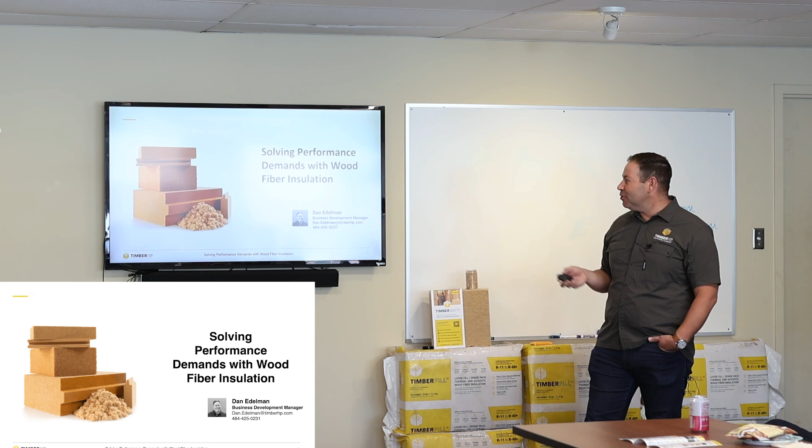Thanks, Darren. And so, yeah, I'm going to go ahead and get started. So I'm going to be going over solving performance demands with wood fiber insulation. So TimberHP, that's the company that I'm with. We basically changed the name from GoLab to TimberHP, mostly because obviously we're a timber-based product or bio-based product. And the HP stands for high performance, healthy planet, and healthy people.

So those are kind of the three pillars that we really strive upon, really trying to get our product into the market to, at the end of the day, sequester carbon, but also make sure that the products are very healthy for the installers that are using it and the occupants of the homes. So this is just a quick, brief video on kind of our mission story of why we're doing what we're doing.

You know, our family's always been in the sawmill business. We love the way of life, and it's hard work, but there's nothing wrong with hard work. If you lived on an island, probably you'd be in fishing, or if you lived in the desert, you'd be doing something with sand. But we live in a sea of trees, and it's only natural that we make a living from the woods and off the land. We make square boards, rectangular boards, out of round logs, so we make a lot of chips. And those all go to the paper companies.

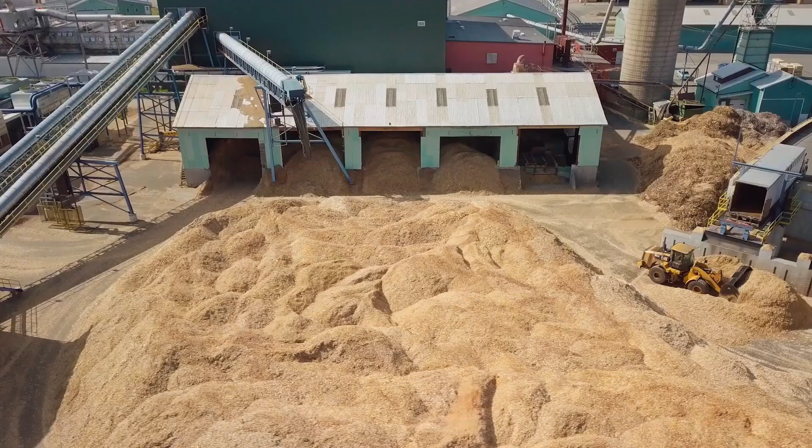The paper industry has been suffering. When we lose those paper companies, we lose the market for those chips. And that means that the whole wood industry in Maine is suffering because we need markets for a low-grade wood. Buildings account for about 40% of the total carbon emissions globally. Buildings have to save energy to address climate change.

You know, one of the advantages of having a design build company and not just being an architect is that you get feedback every day about the buildings you're building, the materials you're using, and how it's going. It really depends on the insulation product you use as to how effective you're going to be in actually saving carbon. We've always had complaints about insulation. It's itchy, it's scratchy. We make all these microplastic beads when we cut it. They have kind of scratchy respiratory issues after using it. They're using full respirators and Tyvek suits in many cases to install it. We knew there was a problem.

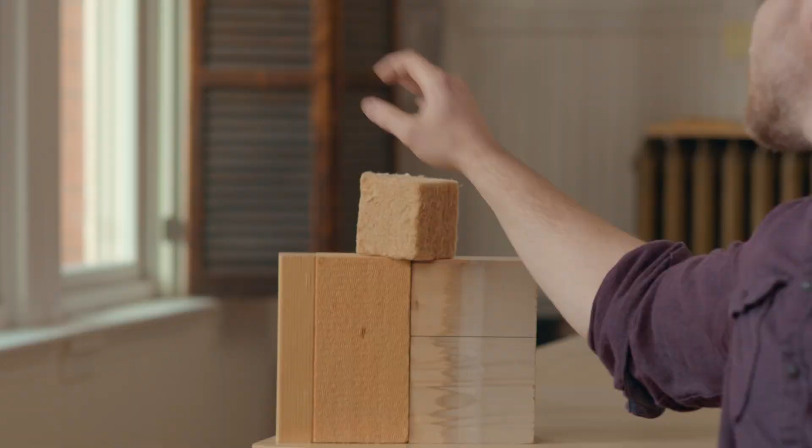It takes about 8 years of energy savings, carbon savings in emissions to pay for the carbon debt of the original insulation you installed when you're using conventional insulation. Quite frankly, we don't have 8 years to wait. You just pick it up, you know what it is. You know that it's wood fiber. I wanted to know more about the product and how it performed, and Matt said, best in class acoustics, best in class vapor permeability.

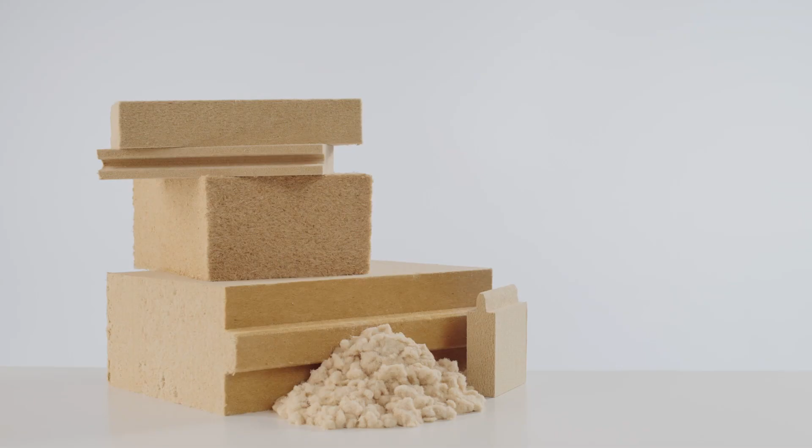So we knew about wood fiber insulation from Europe. We're talking about a material that's natural, it's 95% wood. There's no added toxins. And I said, when are we going to use it? And he said, never, because it's not manufactured here and shipping it is not a business model that works. And I just couldn't really accept that. I couldn't understand why this product was not manufactured in North America, where we have better wood resources than they do in Europe, and we have a building style that fits this type of insulation better than what they have there.

I lived in Maine all my life, and you drive around Maine, any town you go through almost, there's some buildings sitting there that something used to be there. Most people don't realize what a tremendous economic engine a paper mill is. They employ hundreds of people.

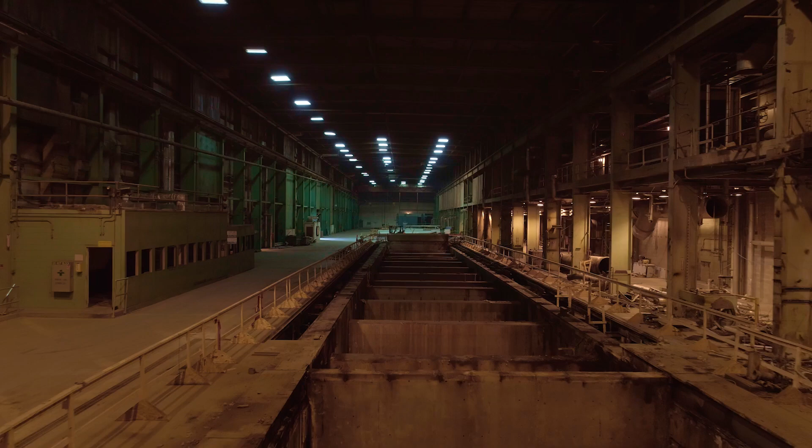The people who worked at the UPM paper plant for so many years, their intellect, their capability, their passion for forest products for the community, losing that out of your community, a small community, is absolutely devastating.

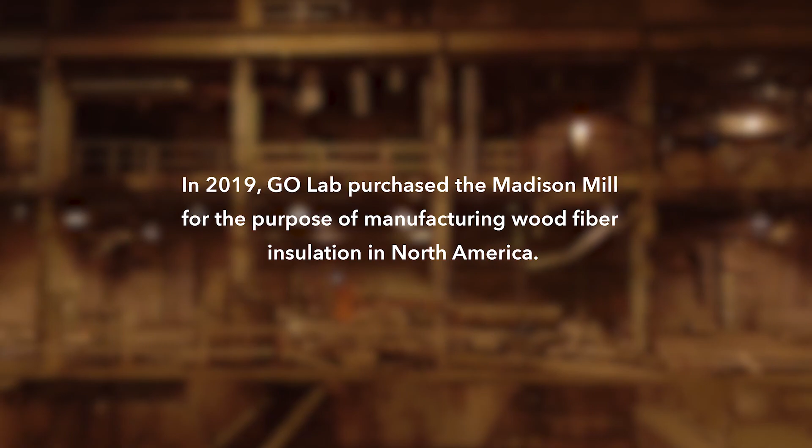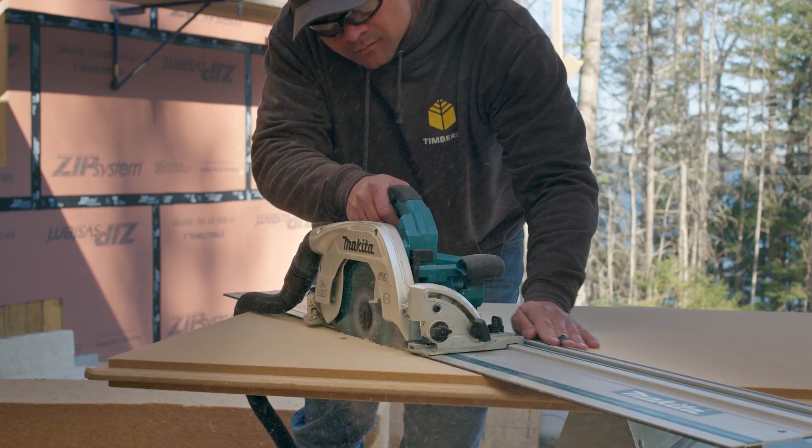When we're up at full production, we're employing more than 100 people in that community. Well, those are 100 good-paying jobs in a community that is a couple thousand people. That has a multiplier effect that is massive for the overall community, and it really is the identity of a lot of these communities in Maine.

We need working forests in order to grow the forest, in order to keep them viable. When it comes to Madison, it's right in the heart of the wood basket for Maine. We have a huge market in the Northeast for insulation. It's the biggest insulation market in the entire United States. We have a lot of existing housing that needs to be upgraded.

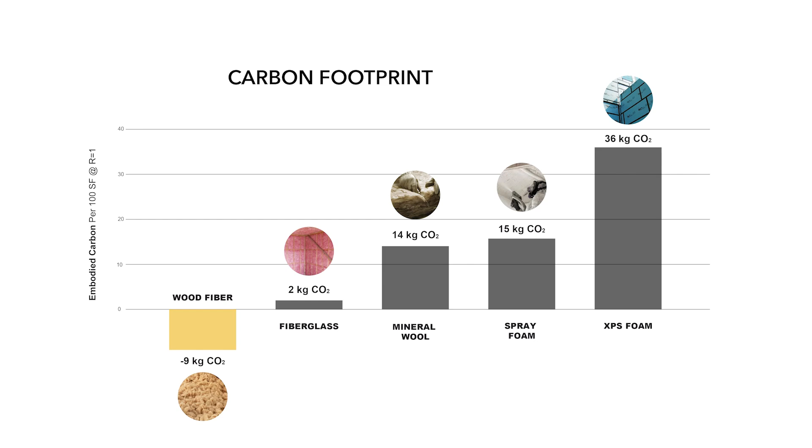The key to addressing the climate crisis with buildings is to not only save energy in the future, but also do it with insulation products that come to the job site with a negative carbon footprint or that are carbon storing. And wood fiber insulation is the only scalable option that can do that. You know, it's easy to handle, it's very familiar, it's not scratchy. They can cut it easily. The byproduct of the cutting is sawdust.

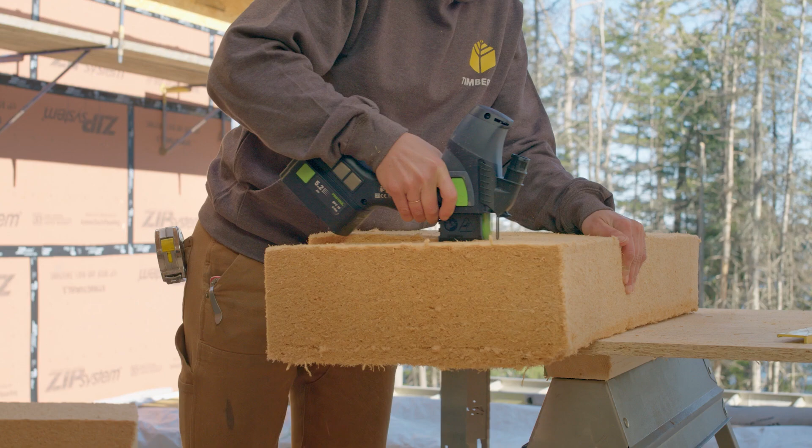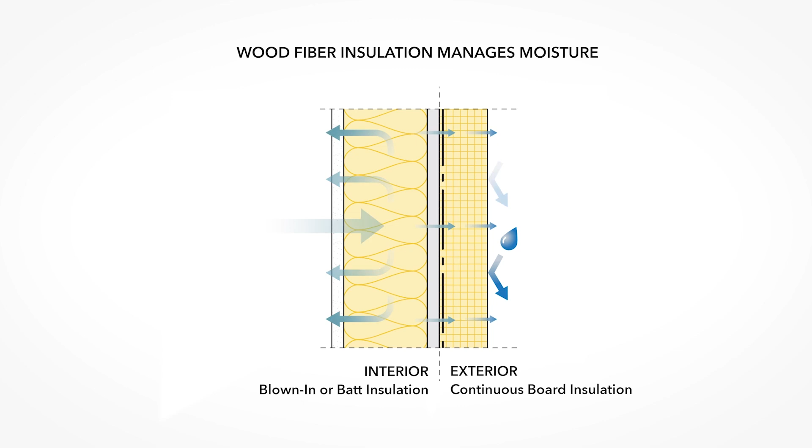With wood fiber, you never have that impermeable layer, and like Gore-Tex, it allows that moisture to move through the assembly, not causing any mildew or rot in that wall assembly. And so the game-changing aspect of wood fiber insulation is that not only does it have the favorable building performance attributes, but it's also cost competitive. And that's really key to the success of any insulation, is that it has to be cost competitive with the alternates in the market, but also bring the building science performances that we need.

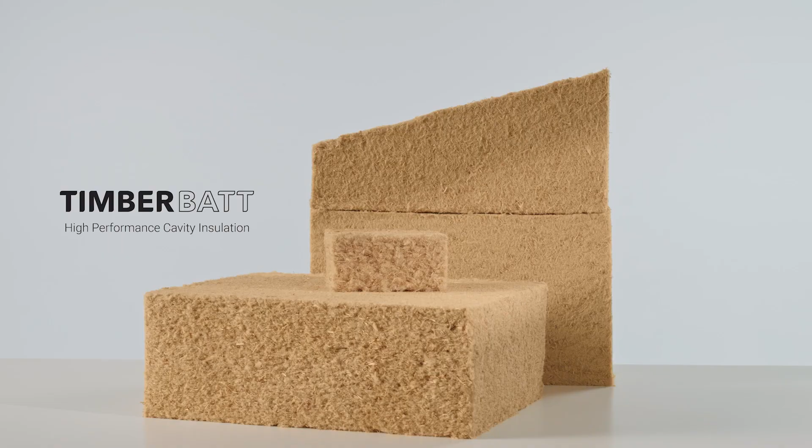It is a dynamic industry, and we have to keep changing to keep up with the times. Every time you add a little more value, you leave some of the competition behind. Well, I see the same thing with GoLab. They're going to make at least 3 different products there. You know, that's adding value.

Wherever there's timber, there's sawmills. Wherever there's sawmills, there are residuals that they need to get rid of. And everybody I know that burns their chips would rather sell their chips to somebody like a GoLab or a paper company. Once the reputation gets out there and what a great product this is, and people learn how to use it, I think it will go all over the country.

So one of the really cool things is we were doing the same training up in upstate New York. Sorry, it gets a little loud.

We were doing a training up in upstate New York, and the lumberyard that we were at actually said that they buy their lumber from Robbins Lumber, and now they're also buying the insulation, so they're literally using almost the entire tree. The only part of the tree that's not used is the bark in our current facility.

So this is our current facility. We're sitting on the Kennebec River, so it's absolutely beautiful. If anybody ever wants to go to Maine, we do have factory tours as well. It's quite an experience when you're there. It's in literally the wood basket of Maine. When I go, it's very humbling for myself going in there with this logo, and actually going into the town, and the town is extremely welcoming of us, which is a big part too.

You can see these 2 little, they're actually like a Dyson vacuum cleaner, and it'll go through the process, but that's like a drying chamber. We do use hydroelectricity. So 99% of the factory is actually run on hydroelectric power. So that's another part. Currently, for our EPDs, we need 1 year of production time to get a good sense of what those are.

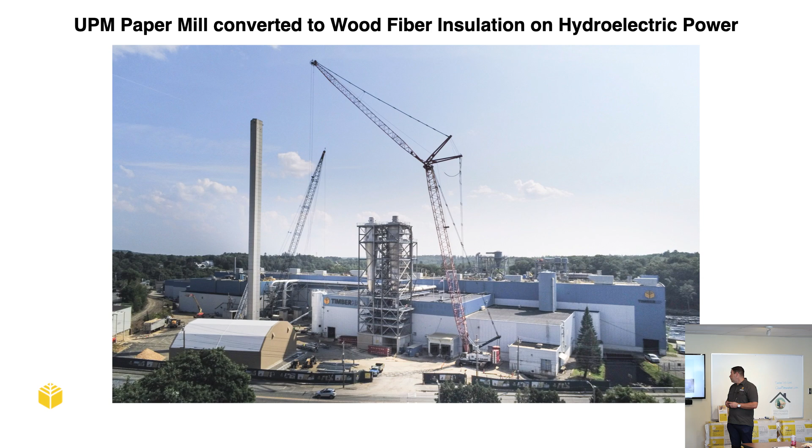So for that piece of equipment, we brought the equipment over from Germany, and we're getting some assistance on rebuilding that machine right now. It's all built, and we're just missing one part that was left in Germany, so we have to ship that over now. It was basically like Barnwood Builders, if anybody's familiar with that show, how we numbered and labeled every single joint and intersection, then shipped it over. The machine actually cost us about $2 million to buy and $4 million to ship. So just like a lot of these insulation products, sometimes the shipping gets a little expensive.

And all the best stuff comes from Germany, though, right? Yeah, exactly. German engineering.

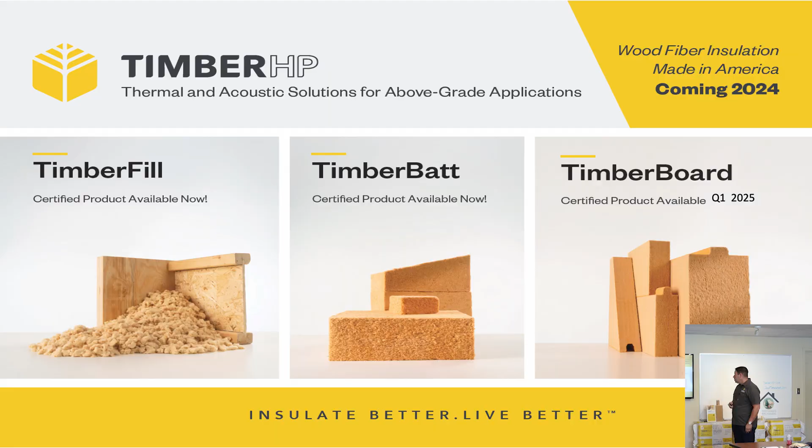But the batt line is a very nice run. The other thing I'll say when it comes to product sourcing, we have 3 separate product lines. That's something very new to me, coming from a mineral background. We actually have a line just for timber fill, a line just for TimberBatt, and a line just for timberboard, and we could run all 3 lines at once. So our production capacity is actually much higher than even a mineral facility.

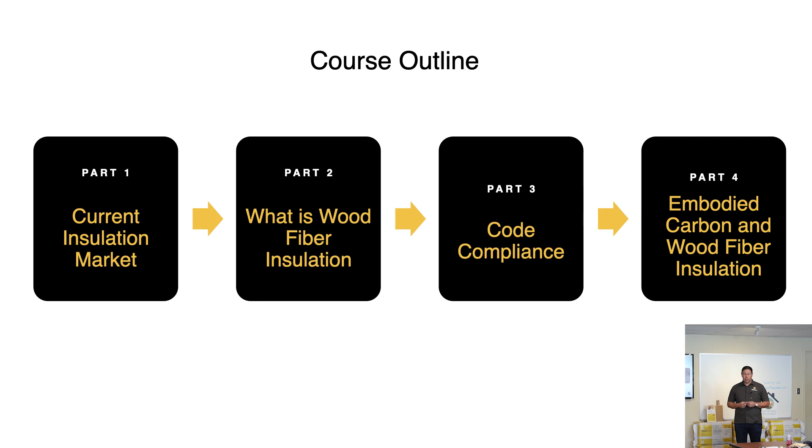And basically, I always like versus this one, I like this one. The course outline: we're going to be talking about the current insulation market as a whole, what is wood fiber insulation, we're going to talk some code compliance, some codes and standards, and then we're going to go through some real world things on embodied carbon and wood fiber insulation.

So the current insulation market - this is actually a cool project up at the College of the Atlantic up in Maine. It was European board, obviously, but also used our timber fill product in that.

So in the U.S., it's a $100 billion insulation market right now, so it's a massive market. Fiberglass holds most of that - it's 56% of the market is just fiberglass. Foams and plastics are about 35%. Mineral wool is 4.7%, and then all the others.

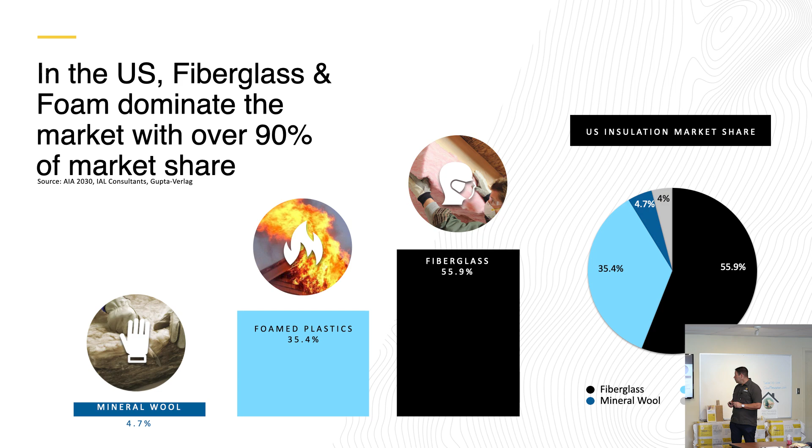So we're still new to the North American market. If anybody has checked the news or got our newsletter, yesterday we announced that we do have a strategic partnership with Saint-Gobain, which is the same company as CertainTeed - so the global leader and the biggest company in the building material world. They're going to help us with our codes and standards, getting more UL listings, more ASTM standard testing, a lot of just help with that. And they're also going to be distributing in the Canadian market as well. So that was some big news.

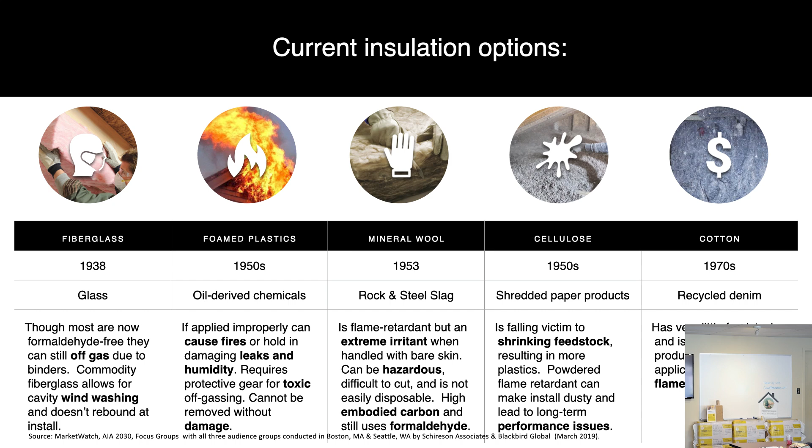So a little on current insulation options that we have. Fiberglass developed back in the 1930s. There's actually some fun stories when people first started insulating homes in general. Painters wouldn't actually paint the houses because of something called vapor drive, and it would pop the paint off the exterior of the house. So we'll get into a little bit more of that, also with vapor control and different climates and all that. Obviously, this is a cold climate.

So basically, there's increasing building codes as well, and that's one of the biggest challenges right now with the current insulation market and why we're seeing so many shortages, because now code is actually driving it up. Even though there's basically the same amount of buildings getting produced year over year, when the insulation packages are elevated, especially with continuous insulation, that's going to put a bigger demand of insulation products out there. Now, if we're not thinking about sustainability when we're looking at these insulation products, it could take a very long time to make sure that we're still carbon neutral right out of the gate with those insulation products.

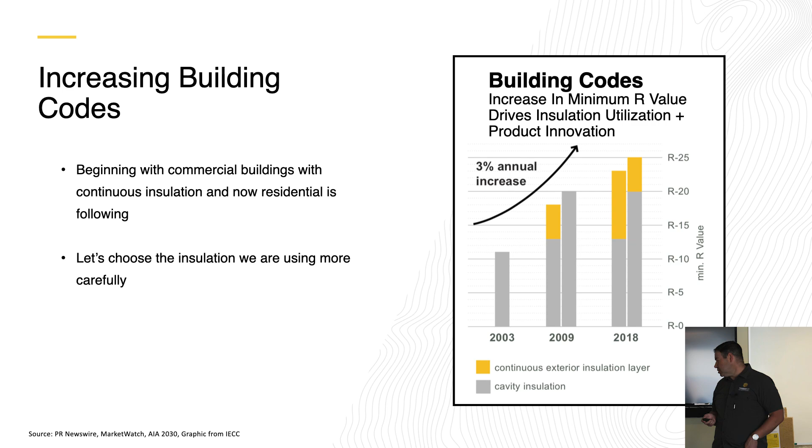And then, there really hasn't been any new updates in insulation products out there. And when you start looking at some of the practices that we're currently doing, if you need a hazmat suit to install a product, maybe it's not the right product. I understand there's a lot of positivity with air sealing and other things like closed cell spray foam. But there are other options out there to build differently, and one thing I talk about a lot is vapor open airtight, allowing houses to still dry out properly without trapping moisture.

Up here, I remember vacationing. I grew up in Michigan, and I remember vacationing in Minnesota, upstate, Upper Peninsula, Michigan.

In the summer months, nobody had air conditioning. Now everybody has an air conditioner, so that's something else that's changing. I know this year in Minnesota, we changed some climate zones. Some climate zone 7 counties are now climate zone 6, which is just showing that it's getting warmer.

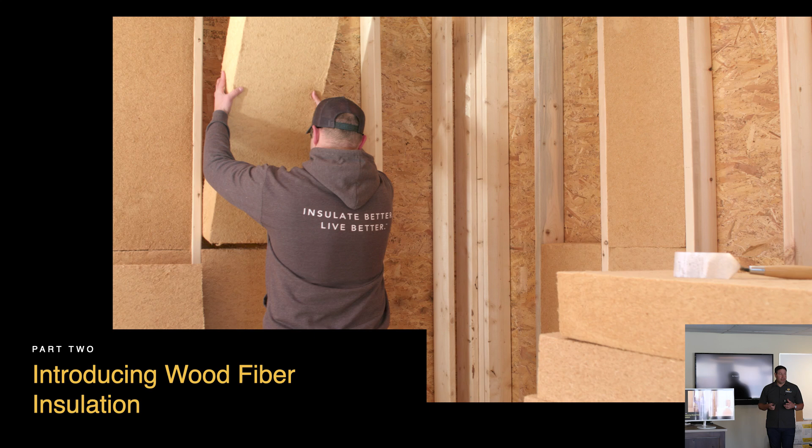Having no vapor barriers in a system is actually very beneficial for the drying potential and durability of that wall assembly. Then introducing wood fiber, you could see night and day difference. It was a cold day, which is why Scott Dion is wearing a sweatshirt, but you could see no gloves. It's not an itchy product, it's not an irritating product. It's just simply wood fiber.

When we look at the current European market, it's a $1 billion industry over there, and they're building most of their homes that way. 25% are wood frame, and the rest are actually all CMU, concrete masonry units, so a lot of concrete over there. It's also a price premium, similar to this market, just from shipping it.

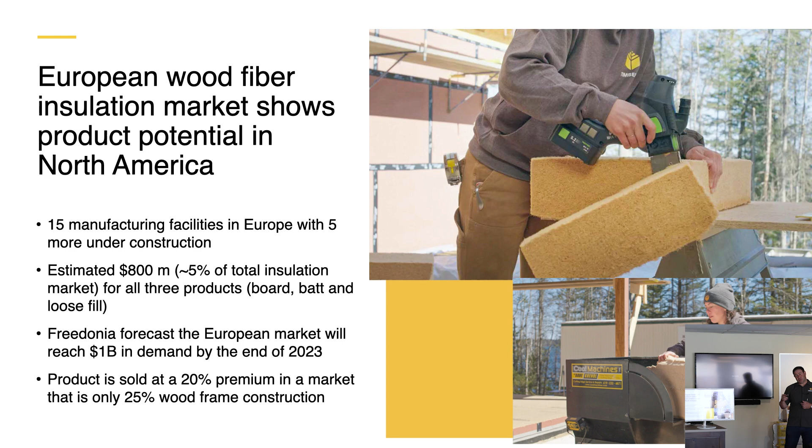As we kind of get in, we do have some future plans for growth outside of the state of Maine as well. This is just a quick video - there are 15 manufacturing facilities of wood fiber insulation. These are them right here, and they all make kind of different products. I'm not sure about volume on this one.

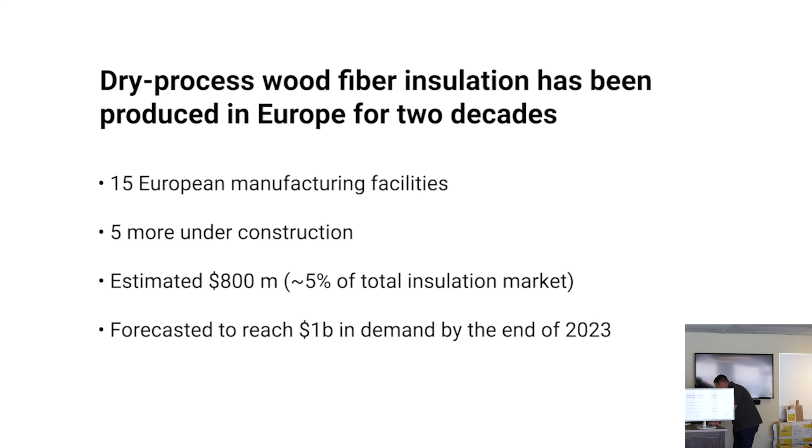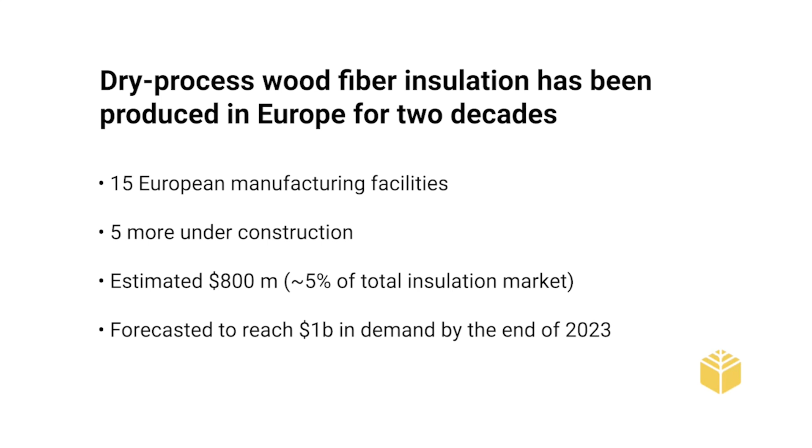Let me back out. It's really just like upbeat music. So just like put a nice tune in your head.

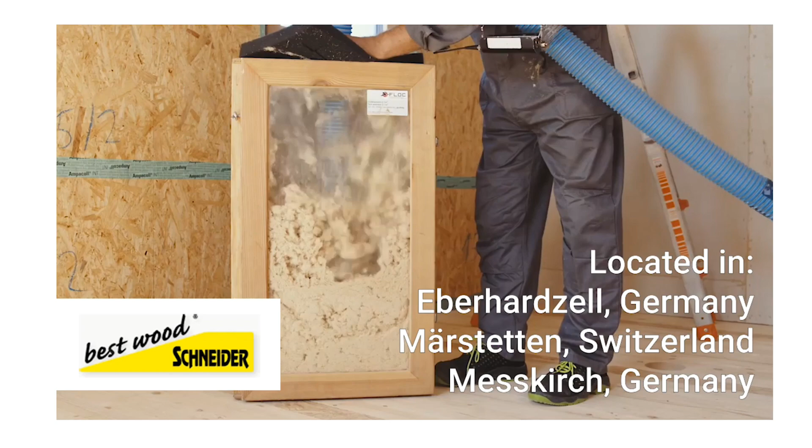But basically, you can see the way that they're working with the product - a lot of off-site construction, modular homes, whatever you want to call it. They are putting like a timber board or board product on the exterior without sheathing. That's something you would definitely want to run by a structural engineer, but it is something very possible, and that's going to be a very highly vapor open system as well.

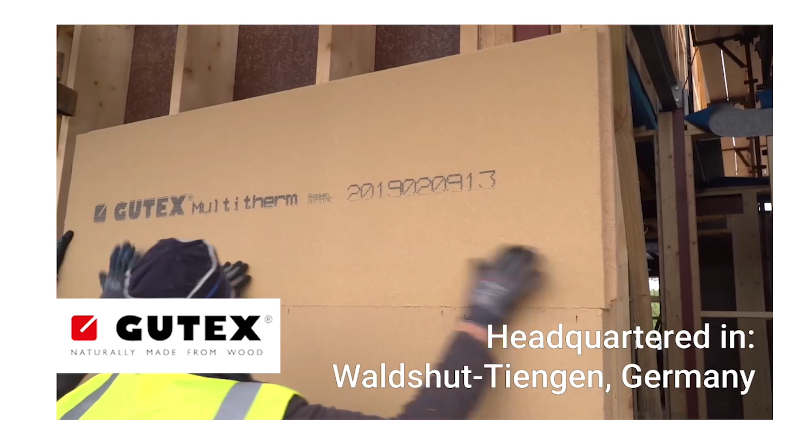You could see they make the blowing, and then you also have Gutex, which is the board, and that's a tongue and groove panel. We are going to start with the square edge and then eventually get into a tongue and groove also. The nice thing about a tongue and groove is you're not going to need to tape the seams if you're using that as a WRB, as your primary air barrier.

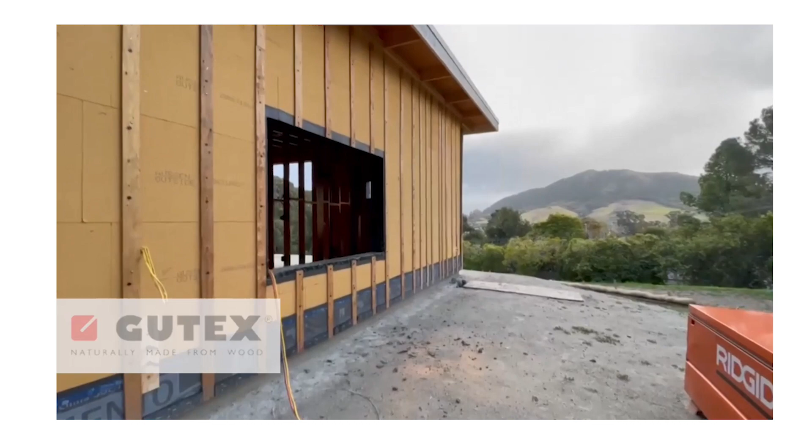So very neat stuff, and you can see some of the cool tools that they get to use over there. The batt product - one of the first early product development things I was in charge of was making sure that our batt is easy to cut with just a regular serrated knife, so just something very simple. The European batt, the big difference is actually the bicomponent product, and I'll go through what that is. But basically the bicomponent makes it a little more challenging to cut than our product here - it's a much more forgiving product than the European market.

Well, yeah, we're going to buy a truckload and...

We'll do that. So when you start looking at wood fiber in North America - I remember hearing about wood fiber probably about 5 years ago, and I was hesitant coming from the mineral wool category. When you start thinking about it, wood is a very abundant resource in North America. 99% of our homes are built out of wood, untreated wood. So if anything, this is actually going to be more durable than the wood stud, the shell of the house, the structure of the house. It just really makes sense for all above grade applications, or not in contact with the dirt. That's our only rule - we don't want to bury this product.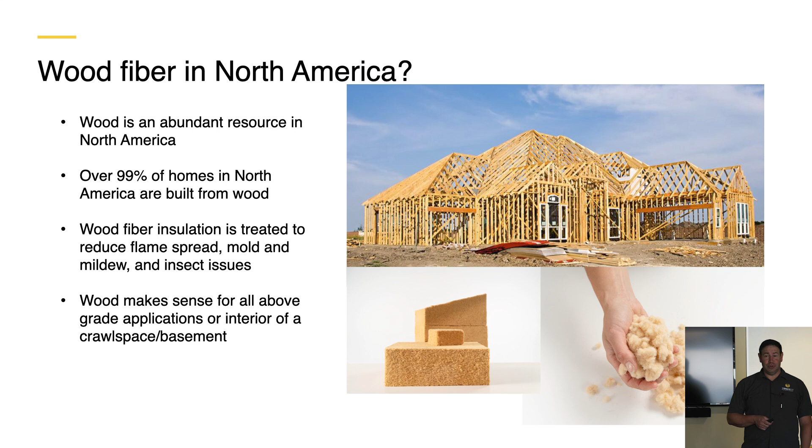It can be handled without wearing gloves, long sleeves, or chemical respirators. We do still recommend a dust mask and eye protection for overhead work. It's still similar to cutting lumber.

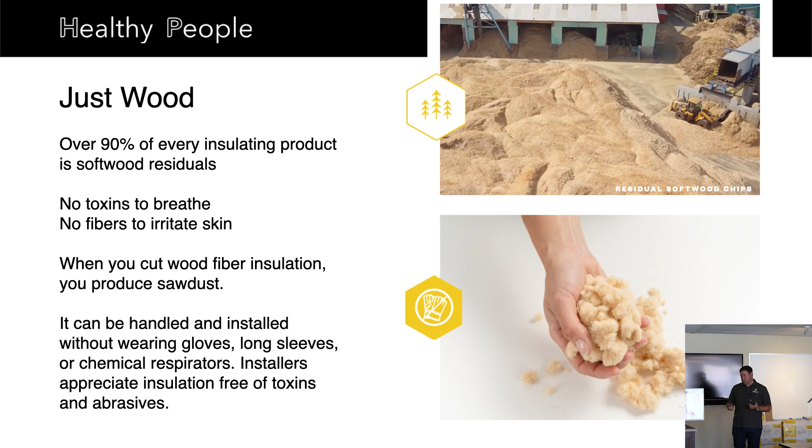When we're actually producing it, what we're doing is taking the round logs. We're not cutting down trees for this. We're working with Hancock Lumber, Robbins Lumber. They're milling dimensional lumber, rectangular pieces of wood out of a round tree. They debark it first, and then they create wood chips, so they're chipping all the waste wood.

Who pays for the shipping of the wood chips? How does that fit in there? So for the wood chips, we pay for the shipping, but literally it's right up the road. When you come to the mill, you'll see the logs going up past, and then the wood chips are coming back down. So, yeah, it's pretty cool.

And then the different processes. So we basically take the wood chips, we steam them, we shred them with big giant plates, and then we add the liquid borate.

That's something very different in the industry. If you've heard of cellulose products with borate, they use it powdered. That's where our founder, Josh Henry, comes in. He's a material chemist from the University of Maine. He was a professor there, and he was able to liquefy the borate so it impregnates evenly throughout all the fiber, and with that you're not getting a dusty product.

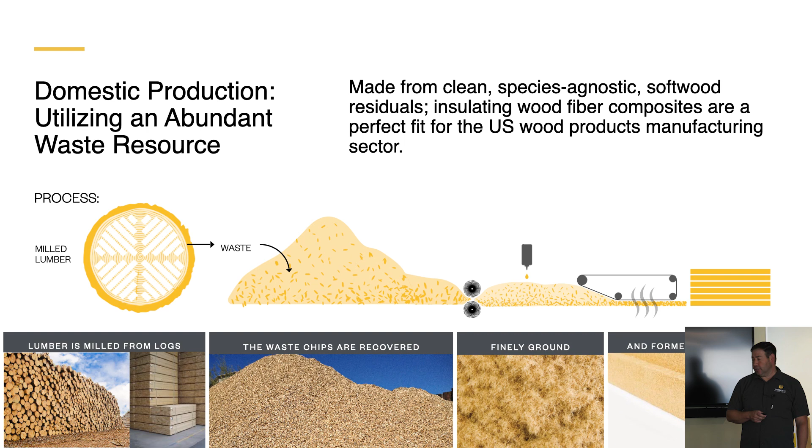The difference with the board is we're using a PMDI binder that's essentially Gorilla Glue, and then we push steam through it because it's vapor permeable, so steam will go right through that, and then it cures the PMDI binder.

Obviously, it just costs money. So we're trying to do a lot with the Maine location first, but we already have plans and have received the largest grants in the U.S. Forestry Division that any other private entity has received, because they're looking at Oregon and Washington State. Over there, we're going to be helping with deforestation to reduce the chances of wildfire. So a lot of the branches, the smaller twigs, things like that. It will be a completely different process there than it is up in Maine. But wildfire is something we all want to partake in helping out with wherever we can.

So some of the features and benefits, we've been talking about carbon a little bit now. Carbon storing, and that's just the nature of trees in general. By harnessing it and locking it into your walls, it's mold and mildew resistant, and that's another activity of the borate. So it's not going to trap moisture, but also if it does get wet, I've had a sample in my backyard now for six or eight months, and it just gets wet and dries out, wet, dries out, no mold or mildew at all on the actual batt itself, which is really cool.

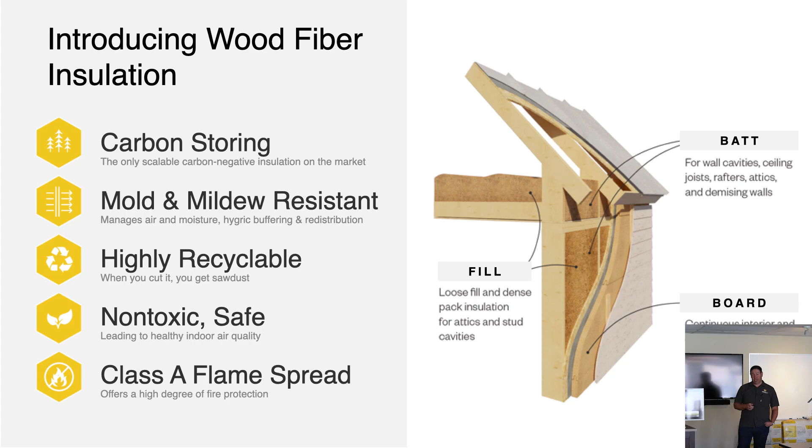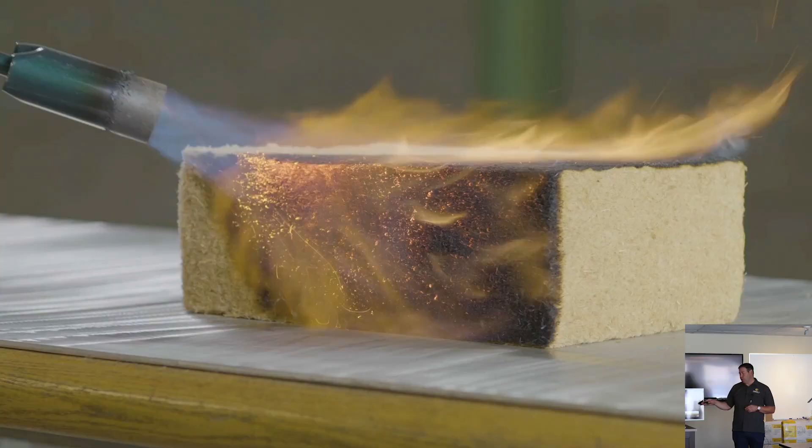Again, with the liquid borate, it's going to protect it. Now if you're burning off the borate, it will actually help self-extinguish the flame, so you don't want to reuse any pieces that got burned. But that's with all insulation products. I always say if your house is on fire, the biggest issue is your house is on fire, get out. But this will give you more time, and there's no melting temperature for any of our products.

Whereas all other insulations will have a melting temperature. Foams and plastics between 300 and 400 degrees, fiberglass 900 to 1200 degrees not paper-faced, and mineral wool is about 2000 degrees. So this, we could take MAP gas to it, which burns at 3600 degrees.

I may or may not have done this, and you could actually put it right on the batt, and it's gonna smoke. You get a little bit of a gray smoke, but that's it. It's never gonna hold the flame, and it's not gonna melt.

So it's 0 flame spread, 5 smoke development.

I'm not sure if I have that in here, the ASTM E84 test. The AIA is slightly different than my normal presentation.

But market position, basically anything above grade. You could also use it in your basement, wherever you'd use like a fiberglass batt. That's going to get wet and lose its shape, whereas this product, if it gets wet, it's going to hold its shape and then dry out. If you do have a bulk water leak, definitely fix the water leak, that's an issue.

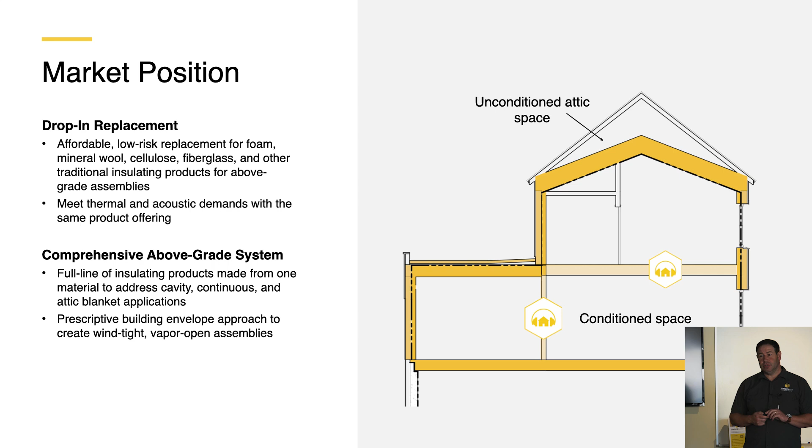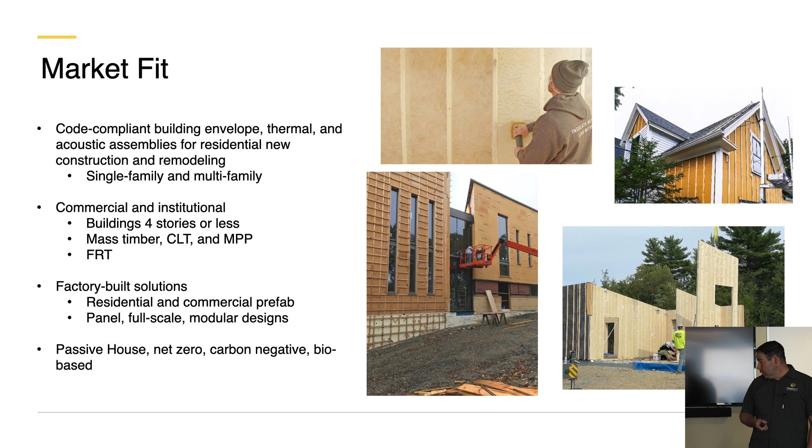And right now we're kind of focused on that type 3 to type 5 construction, which is your wood frame construction. You can use us in steel frame as well. We do have some fire engineering reports that showcase an 80% load-bearing wall with steel studs, 1 hour and 2 hour fire ratings. And with wood stud, it's 100% load bearing. So obviously if it's a non-load bearing wall, it's a shoe-in for those. But even load bearing, you could actually use this for a fire and sound wall insulation.

So the loose fill, pretty much some of the perks of this product, obviously the ease of use. You hire an insulation contractor, they blow it up in your attic, weatherization contractors, or the dense pack. And that's actually something that I'm pretty new to, but after actually installing it myself in this old house and other projects, it's quite nice because it will completely detail a lot of those areas that are really hard to cut the batt around.

You could really just net it with InsulWeb, and then basically just stick your needle in there and dense pack it to a 3-pound density.

Another nice benefit, and something I do have to bring up, is the fact that you want to use InsulWeb even before you put up your vapor retarder. So if you're using a smart membrane like an Intello, a Siga, or a Certainteed smart membrane, those don't allow air out. So when you're pumping a product in, it's going to slow down that production. You could use relief holes, but then you're taping up your air barrier, and the issue with that is then you have a bunch of holes and costly tape. And if you forget a hole, then you cut your air barrier. So that's where the InsulWeb helps first, and then you would come back with the membrane that you choose.

It's an R 3.8 per inch. Again, on the coverage chart, you can see what that R value is in an attic or in the walls. Then our batt insulation.

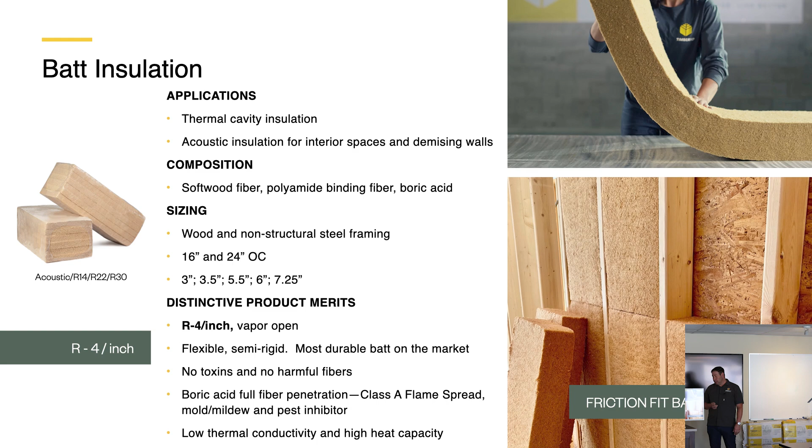We're R4 per inch on the batt. Again, factory setting—we could really mess around with the densities a lot more. We are a much higher density than other products, so that's about a 2.8 density. And what that means is you get a lot less convective looping and other things happening in your wall, just a tighter fit in that wall cavity.

And then some incredible results with sound. Yeah, I think I do talk a little bit about sound in this one, in the codes. And then insulation for all seasons.

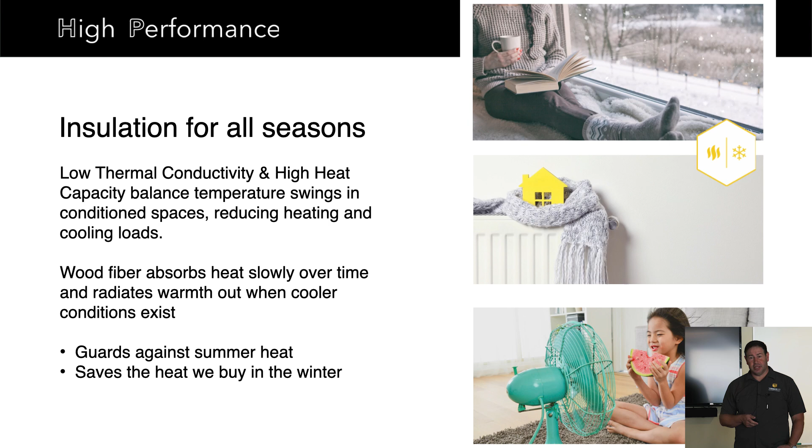So despite what people think, we also need to cool our houses or keep the heat out of our houses. And the thermal capacity of this product is by far the best on the market right now. When we start looking at this—it's just like a little thermal lag test, so how long it takes for heat to move through this product. You can see the R values: it's R3.6 per inch versus R4 or R5, depending on other products.

But when you start looking at the time and the temperature, we'll get a little bigger on this. So you'll see after 10 minutes, you can see the temperature—there's a little diode in here, and you can see the temperature difference. So it's going to store a lot more heat. Here, when it's hot in the summer, it typically cools off in the evening time. That heat will actually get stored and then get released when it gets cooler outside, so that heat never actually makes it into the building. If anybody's ever lived in a CMU build, old stone house, or big log cabin—I guess would be more around here—that's going to take a long time for the heat to change within a house. And that's really not because of R value, that's because of thermal lag.

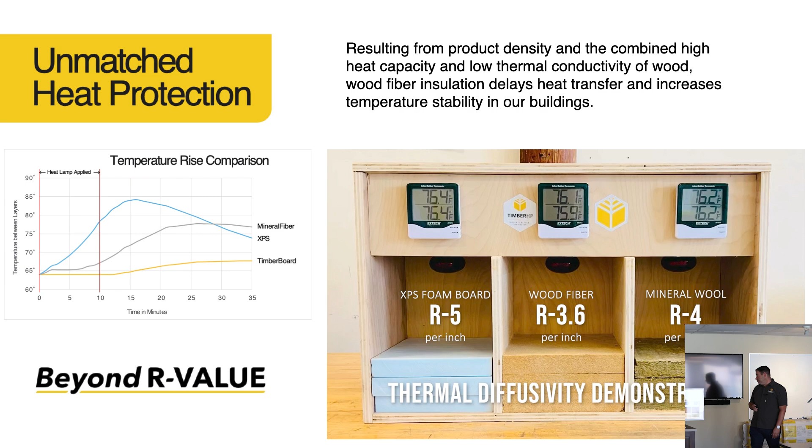Then the continuous board. Again, we're going to have the square edge and we're going to have a tongue and groove. Early on, it's going to be 4x8 sheets, starting at 1 inch and going up to 9.25 inches. So it does get heavy at those thicknesses. So we're primarily looking at those really thick boards more for the modular industry where they have cranes moving them, because a 9-inch board will be 300 pounds. 5.5 inch is 145 pounds. It is a 15 PSI product also.

If you look at the PSI of other products, they range depending on which ones you're using, foam, mineral wool. But you could actually put this product down on a floor, put one layer of like 3/4 inch plywood on top, and you could actually walk on that. So you could use it as kind of a subfloor material. It's also great with sound in between floors, or even a concreteless slab if you're doing a conditioned crawl space or basement. For anything with a lot of traffic, like a basement, I recommend 2 layers of 3/4 inch plywood to cross laminate those, so it doesn't move as much.

But that weight basically indicates the thermal mass too, right? That's correct. I think you'll be able to use the board material instead of plywood? Probably not. You would still need to hold it down somehow, and the plywood effectively is what pins it all down to the ground. Or for walls, you probably still have to do strapping or something. Oh, for shear, if you're getting rid of plywood or OSB on the outside, you either need to use a little bit on the corners or the metal shear strapping. Sure. So either of those options do work.

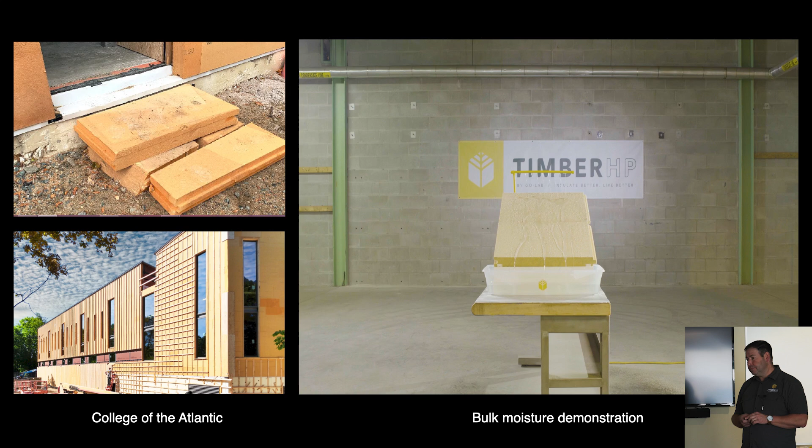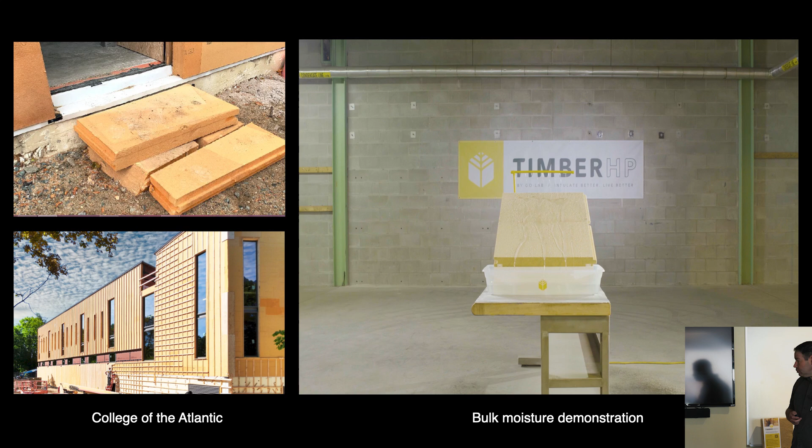What's your release thought for the different thicknesses? So we're going to start with 1 inch to 4 inch, probably every ½ inch to begin with. Then the 5.5, 7.5 and 9.25 are probably going to be non-stock items that we could still produce early on, but in full truckload quantities. This product ships really nicely, meaning lower cost per square foot, because we can fit 30,000 square feet on a truck. Do you envision the 1 to 4 coming soon? December is when we're saying we're going to be shipping.

You can see the durability of the board. This was actually on a project for the College of the Atlantic for about 1.5 years, and they're using it as steps. So you can see the durability of the product is very high. Also, it's water...

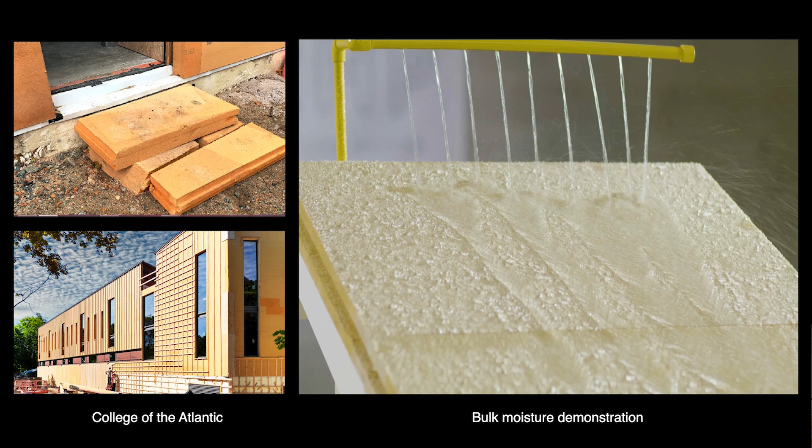This is the hydrophobic. We do treat it with the 0.5% paraffin. And our goal is to also treat it with borate, so then it will counteract any kind of wax with a fire rating. And our goal is to have a Class A fire rated product for things like NFPA 285 and other commercial codes. That is in the future.

Yes. Some folks, for fire, you kind of look and, well, if you're going to use this inferior product, you just do like a double layer or something. Correct. And kind of offset the joints. Exactly. That's kind of what a lot of builders are going to be doing anyway, I find, because they're used to doing that with foam. Although we don't have the same shrinking and expansion of like a foam product. So, and again, that's another test that CertainTeed will help us out with, dimensional stability.

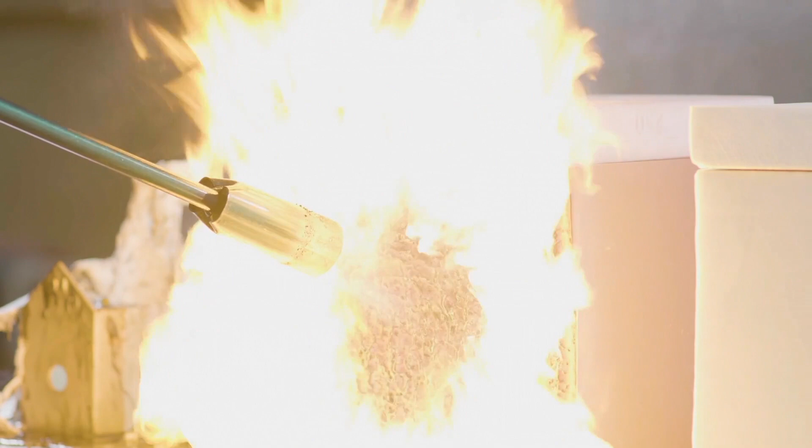Then this is just talking about, this is a Class B board that was in this fire video, but you could see kind of what happens with this. Is there a problem there? No issue. But again, melting temperature is very low on these foams. They're still Class B products, just like ours in this one. This is the European board, and they don't treat it with the liquid borate, so it's going to be a Class B. But again, it's like a log. It's going to take a long time for it to actually burn through the product itself.

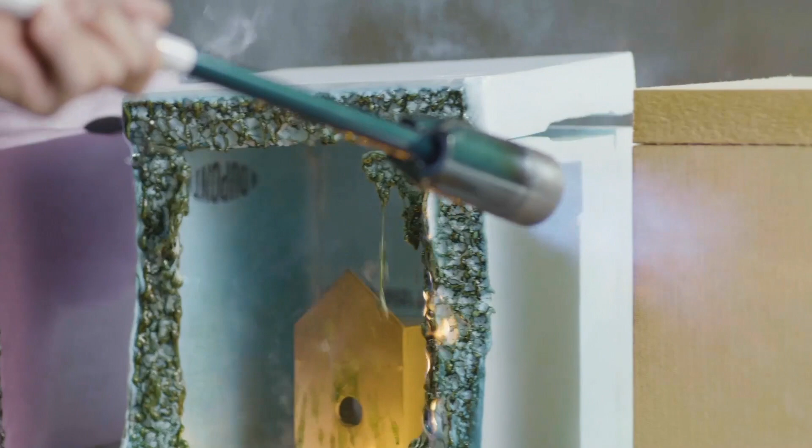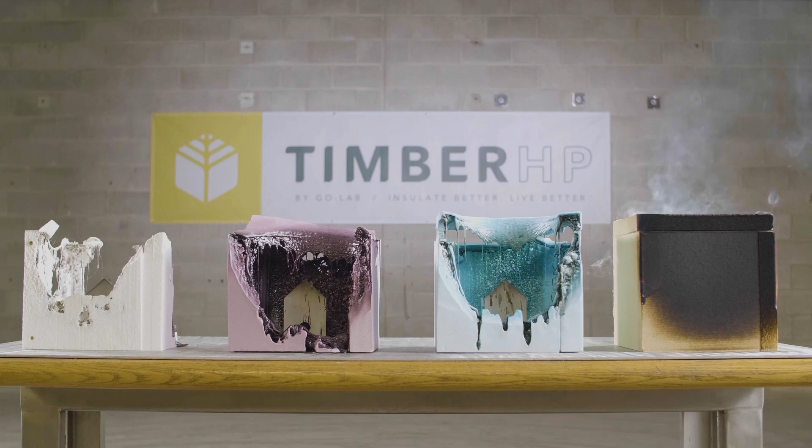I would imagine it's like burning a pile of sawdust. It just doesn't. Right. Or a bale of hay. I tried doing it. Eventually, those biodegrade. Wait, which one's that last one? That one looks awesome. That's the wood fiber board. So, yeah, you could see it smolders. Again, that's a Class B, so it doesn't have any flame retardants or anything on that one.

When we start talking about moisture, which is another big part with our products, wood fiber is highly vapor open. So at 1 inch, we're at a 44 perm rating, so very breathable, depending on which code you're in. But I always say drying potential is very high. If it does get wet, like condensation inside of the wall, if the insulation does get a little damp, it's able to dry out, and it utilizes hygric buffering and redistribution, which is just getting wet here and then redistributing that moisture throughout the whole product, just like a tree does during its life.

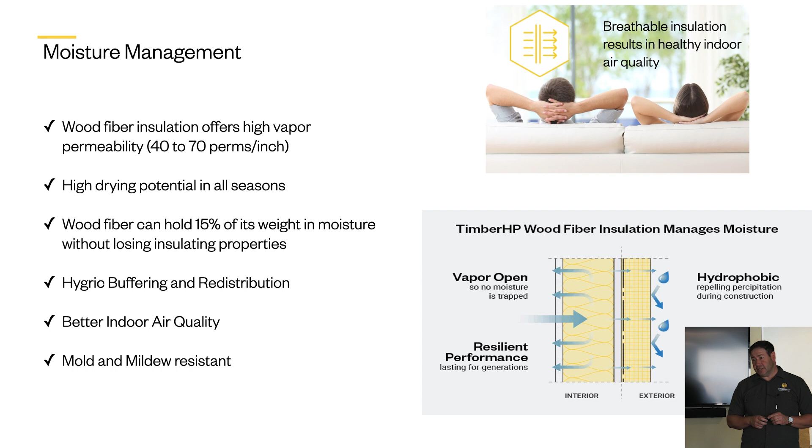It also helps with indoor air quality because it's mold and mildew resistant. It's not going to off gas or anything else. There's no blowing agents in the product itself, so it's really going to help with the indoor air quality of the project. And we can start talking control layers. Obviously your number one control layer is water control. This is going to be the most important one. You don't want your house to rot. And that's going to be on the exterior of this image, right on the outside, where your primary water control is, and that's utilizing the paraffin.

If you're moving your primary air barrier to the inside, it gets complicated with outlet boxes and all sorts of other things. Vapor control layer is going to be on the interior or the warm side of the wall. Up here, I know there's a lot of polyethylene, a lot of reinforced poly. I'm not a fan of that. If the house has air conditioning, we don't want to be using any kind of polyethylene because now you eliminate the drying potential inward. If you do want a belt and suspenders approach, I always recommend using a smart membrane. In the code it's called the responsive vapor control. So that's a Class 2 vapor retarder.

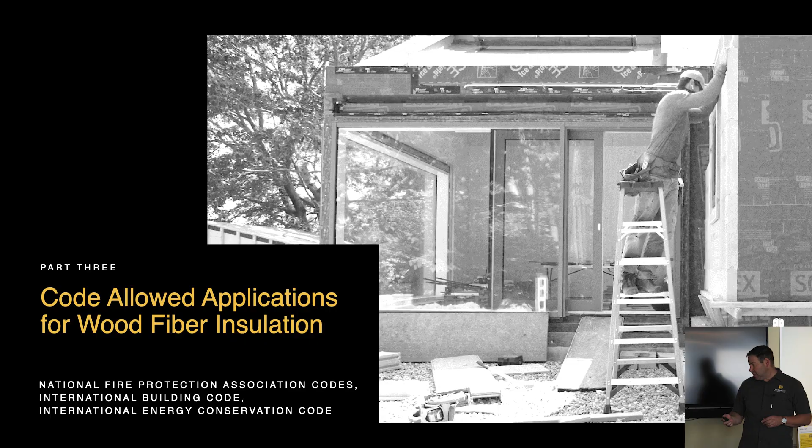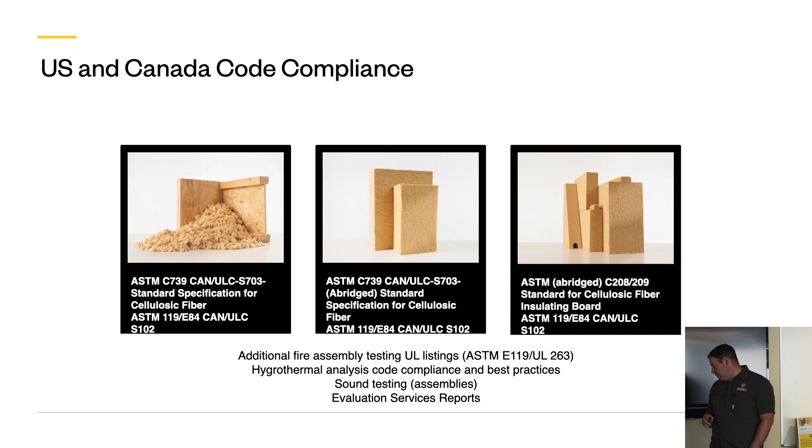When you start, and I'll go through a little bit more on vapor control. Codes and applications. So we are approved in Canada and the US market right now. We're still working on a lot of the Canadian portions, the little subtitles and everything for that, but all 3 products. When we start looking at climate zones and the codes that we're starting to look at for the IRC, the International Residential Code, I'm going to pull out climate zone 6, which is where we are.

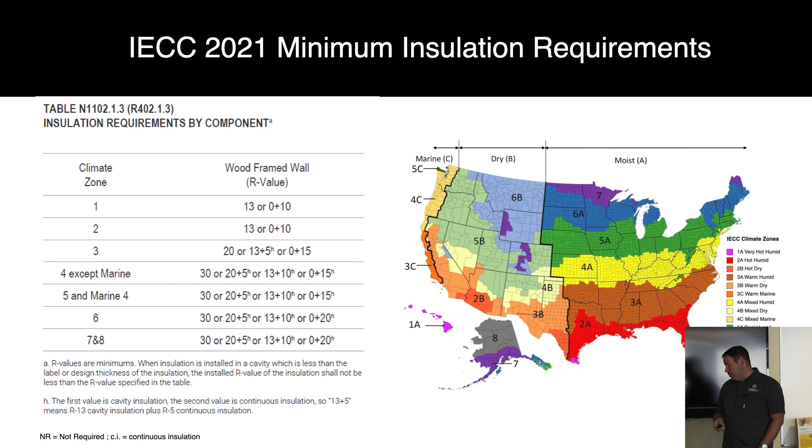And you can see there's an R30 wall. So that's going to be R30 in a cavity. I'm already seeing people building 2x8 wall sections, which in my opinion isn't the best way to build. And talking to some builders, they're also saying that even though it's less labor per se, you're not sending trips around the outside of the house, it is more labor because it's much heavier wall systems, and you still are leaving that sheathing out in the cold, which is always the biggest issue, which is why now in the code, it also has continuous insulation.

So if you look, that 20 plus 5, that plus 5 is going to be what's needed on the exterior. And I will say 20 plus 5, when you look at the vapor control code, you still need a vapor barrier or vapor control layer on the inside of that wall because you're not keeping your sheathing warm enough to reduce condensation. Now, the wall that will work without any vapor control inside is the 2x4 wall with an R10 on the outside. And that's just really looking at your ratio of exterior and interior insulation. So you're warming the sheathing, and your heat when you're warming your house is easier to go through an R13 versus an R20.

It's not a go. Sorry, they'll never adopt the new, so we have a great history of not adopting. Oh, yeah. No, I know. You're still on 2009 code, I think. 2012? Yeah. Well, maybe you'll adopt the 2021. Oh, right. That's right. Yeah. Yep.

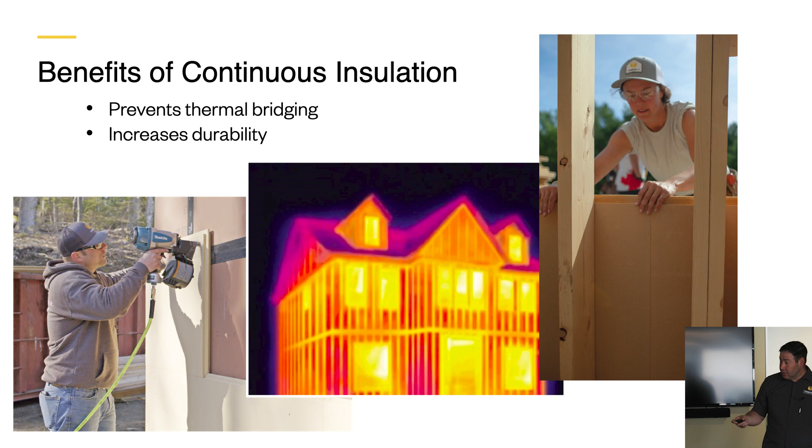Now, right now in the code, I'm going to go climate zone 6. The big thing to remove to go into a class 3 vapor barrier, which is just 2 coats of latex paint on your drywall, the biggest thing is ventilated rain screen systems. So that's going to allow that vapor to move through the wall and dry somewhere. The other thing is using like an R7.5 over a 2x4 wall, or an R11.25 over a 2x6 wall. So you'll see that it kind of looks backwards from the IRC code.

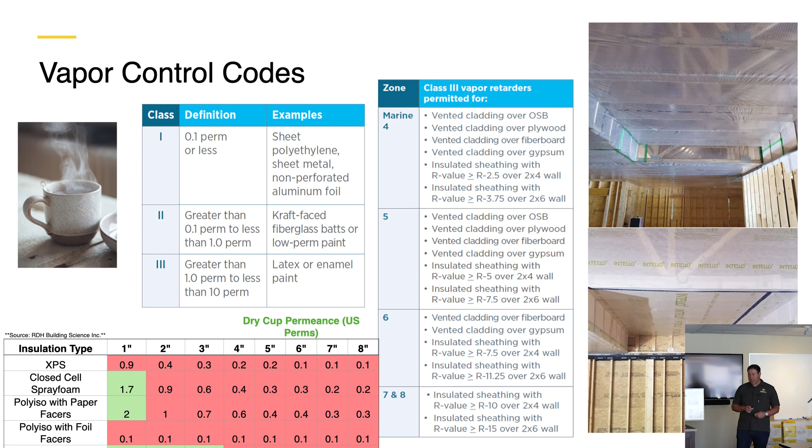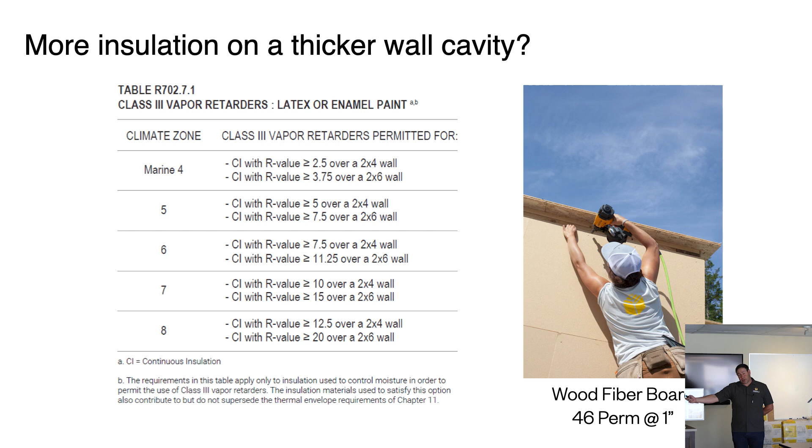So again, not going to be using any more polyethylene plastic for vapor barriers. That's something that we'll have to educate inspectors on. Yeah, exactly. I struggle. Well, poly. So, and this is something that is right in the code. I want to say it's like 7. Yeah, with the EPS on the outside, and that's similar to this too, is you start putting that up. Now, one thing I'm seeing up here is people are putting that R5 outside, but still with their polyethylene vapor barrier, and you have a trap system there. And now they're finding their wall cannot dry, and this is a very unforgiving climate.

Take 1 to 5 years, and if you're lucky, it goes down the building warranty period.

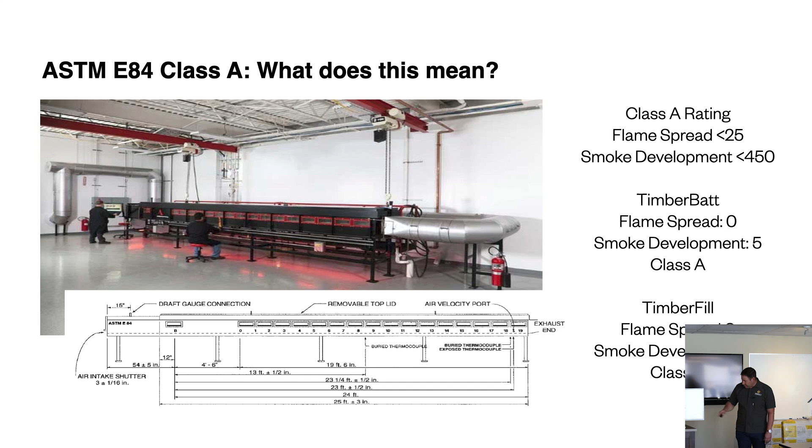This is our smoke development NFPA or ASTM E84 tunnel test. This is basically what the test looks like. They put a flame on one end of a piece of product, light it, and see how far it travels through the tunnel. They also measure with the spectrophotometer the smoke development. So we're a 0 and a 5. We're a Class A for our batt and our fill product.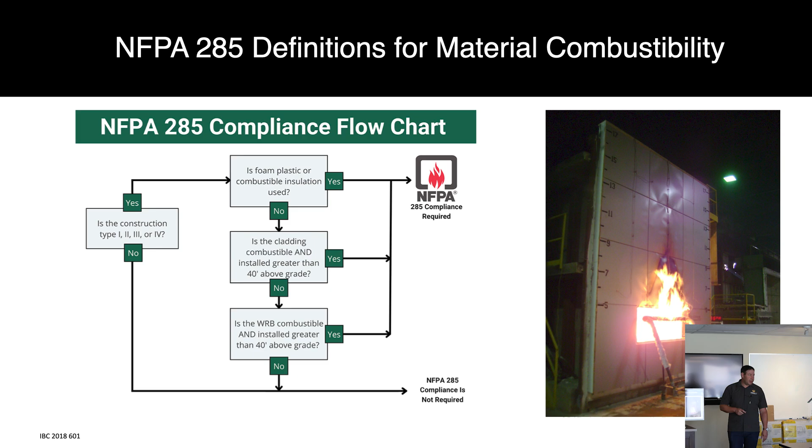NFPA 285, this is a question I get a lot. Our batt, technically, we're going to be doing more testing on it as a cavity for like a Z-girt system or the rail systems used for commercial buildings. We'll get that tested, and hopefully it will just fly right through NFPA 285. But in the meantime, you would need to go, is it foam, plastic, or combustible? Then you'd have to do different tests for NFPA 285 and get it engineered into the system. But again, the batt is not right now approved for that application.

We would actually increase the density a little bit too. And the board would obviously be first. But a lot of times, board strap through installs, we're not seeing that on buildings above 40 feet high, which is where that code kicks in. So a lot of times they're using rail systems with cavity insulation, like cavity rock.

These are kind of the build types that we're looking at getting more involved in, so Type 3 to Type 5 - more of your wood structures, non-combustible exterior walls and whatnot.

When you look at embodied carbon - I'll keep this quick since we're running a bit behind, I'm still on East Coast time - the big thing, and you heard Matt say it in the video, is that buildings actually use 40% of the CO2 getting pushed into the atmosphere right now. That's a big number, even more than transportation or automobiles. The other part that's creeping up is the embodied carbon of the materials themselves in these builds.

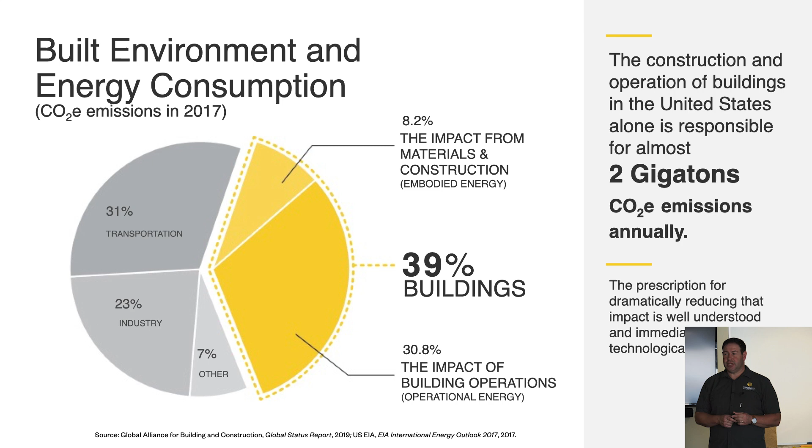If there's an easy way to switch over from one product to another, you could easily reduce your carbon. Another study we're looking at doing is for steel stud builds - to have this product, which is carbon negative, used with steel studs, actually negate that and make it a carbon neutral building, even still with the steel and potentially the concrete used in those builds.

This is kind of just the future, as we're seeing more and more insulation being adopted by the codes. We're going to see that building material carbon going up as more materials are being used, while operational costs level off, because now we're super insulating buildings to a point where that drops off. So you might reduce the amount of operational energy used in buildings, but you'll see higher insulation counts. So by simply changing your insulation material over, it's going to reduce that CO2 output.

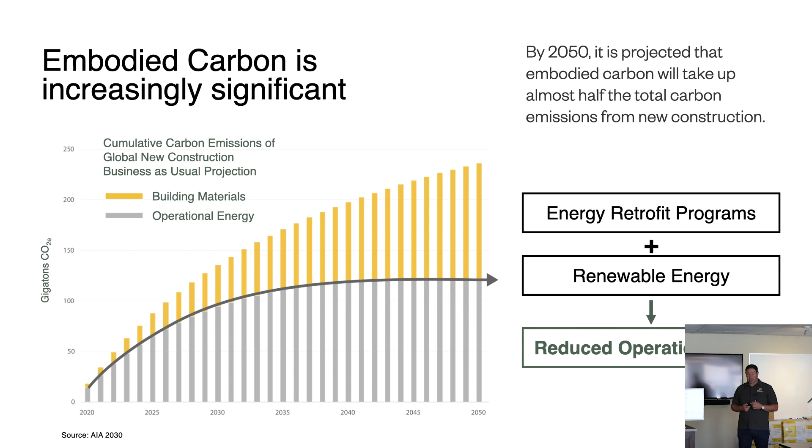When you start looking at the biggest things for CO2 in a building, number one is definitely concrete. Insulation, because there's just so much of it, is number two in every single build. So it's very easy to swap that over.

Then this is just the figures - this is kind of a number from the European product right now. We're going to have our own very shortly too.

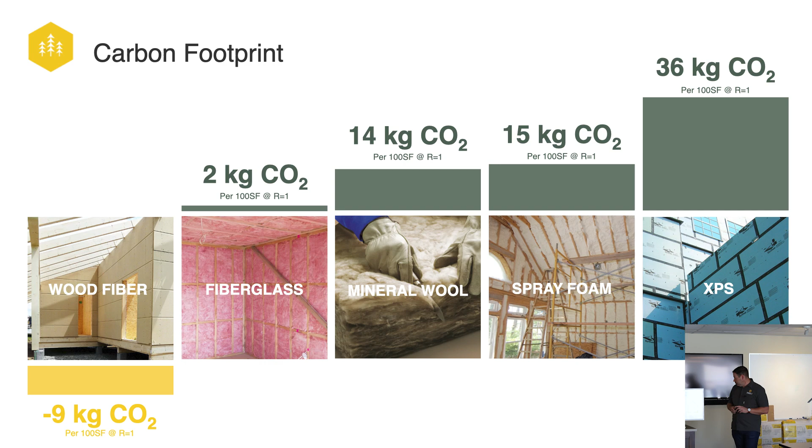So how does that kind of work? Why is it carbon negative? Basically, over the life of the tree, it's absorbing the CO2, helping to absorb that. Then when the tree gets cut down and left to decompose, that CO2 basically goes back into the atmosphere. Whereas by making it into a product, it's basically getting trapped into that wall system for the life of the home.

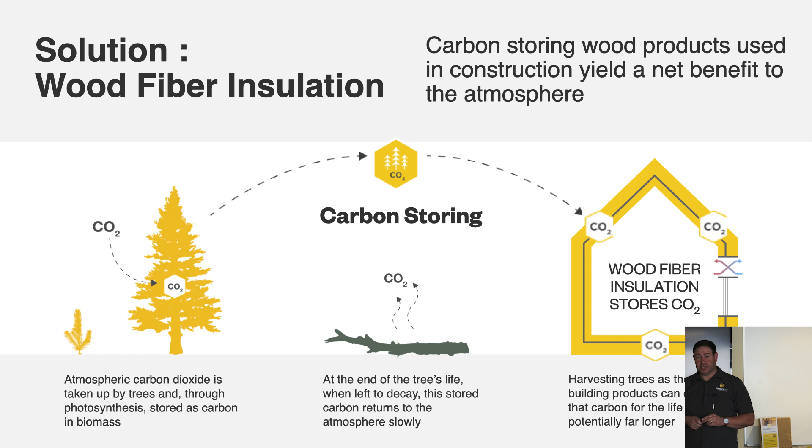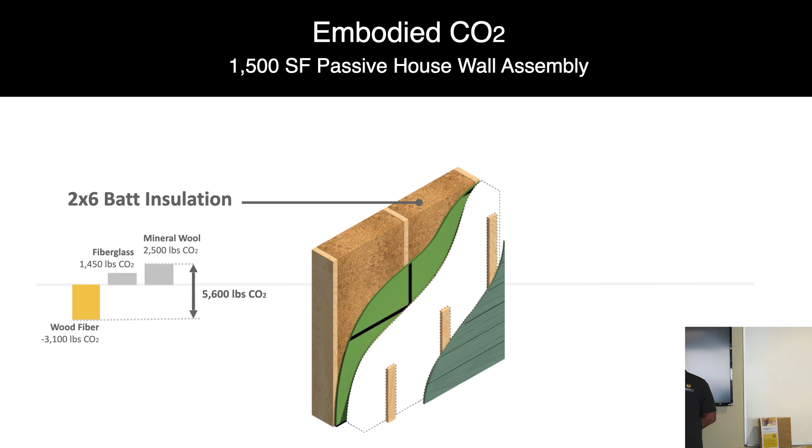When we look at an actual model, this is just a 1,500 square foot passive house. Just the batt insulation alone, if you're comparing it with a mineral wool product, you're looking at 5,600 pounds of CO2 savings. What does that mean? It's basically equivalent to the emissions of driving 7,100 miles in your car. So it's quite a bit.

When we add a board product as well - and what I said earlier about the board actually being more carbon negative, whereas other products are going to be higher - we're now at 19,000 pounds of CO2, which is equivalent to driving a vehicle 23,500 miles. And that's a non-electric vehicle, I might add.

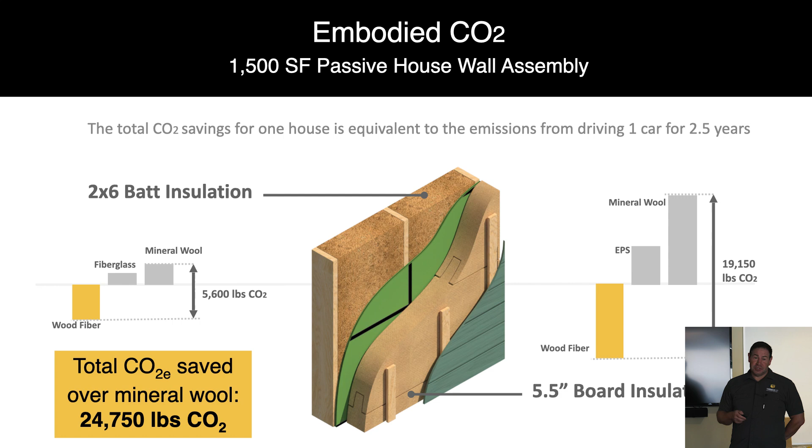It would be higher, almost double that. So combined, we're looking at saving the emissions of one car driving for 2.5 years. That's quite a bit of carbon we're actually saving there.

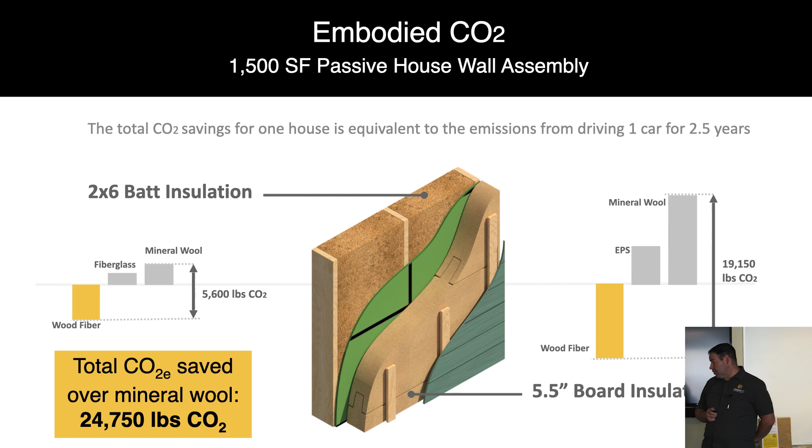One other really nice thing is we have added support. Myself included, with TimberHP, we help with any of your designs, and we could run it through. I've been doing WUFI analyses for many years, so I know what's needed on the outside and inside for condensation control, which is the biggest thing. In this market, typically an R10 or R12 on the outside is going to be the best thing for a 2x6 wall.

And then also eliminating that vapor barrier as well, and just going into like a class 2.

We could set up virtual calls. I could do, we obviously have this lunch and learn right now, and also install support. With technology, I do a lot of FaceTime calls with builders who are detailing a window.

We also have, with Matt Damon, we have Matt Damon. He's our field technician. He's not the Matt Damon, but he's a Matt Damon. He'll be able to work with your installation contractor to dial in the machine, increase efficiency, and help out with any machine out there. So he's also a really good resource.

I could connect you with him, or just connect me with your installation contractor with the fill product.

Yeah, we have another Ben Affleck. I'm hiring him in Ohio. He's not the Ben Affleck, though.

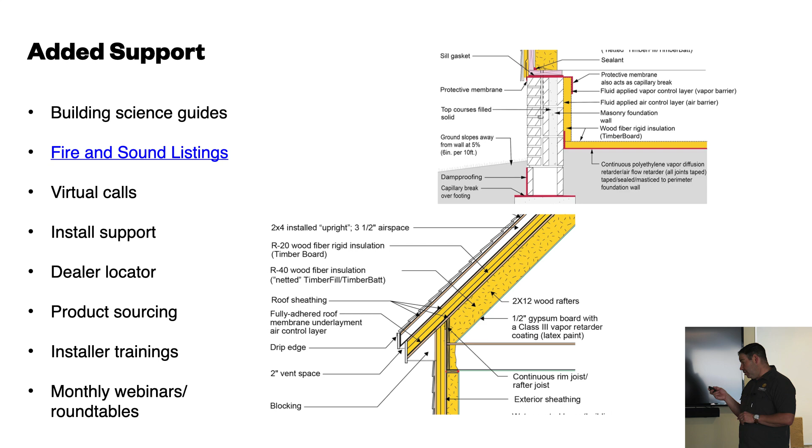As you can also see with our building science details here, we worked with Joe Lstiburek on a guide for builders, which is available to everybody. This is mostly residential, but some of the details are very detailed. Basically this is a slabless, or concreteless, slab on grade, or concreteless slab in a crawl space that you could use right from there.

It is climate specific, so don't look at climate zone 1 and 2 and think you could put a vapor diffusion port in a roof in this climate, because you can't — that's by code. You don't need to hear all that, but that guide is out now.

So if you go to our website on a regular computer, you'll see a banner at the bottom. Click on that and it'll pop up, and you put in your information. It's an 80-page guide, and it's informational too. It talks about vapor control, and it starts with what is a building. It really dives into a lot of really good information, and we wrote that with Joe Lstiburek.

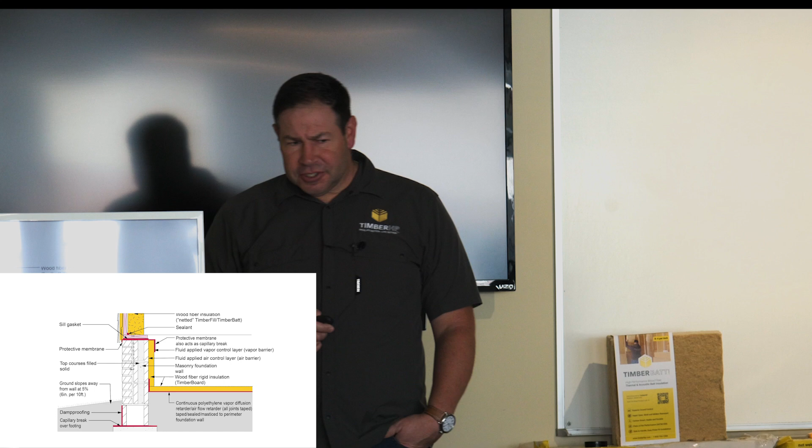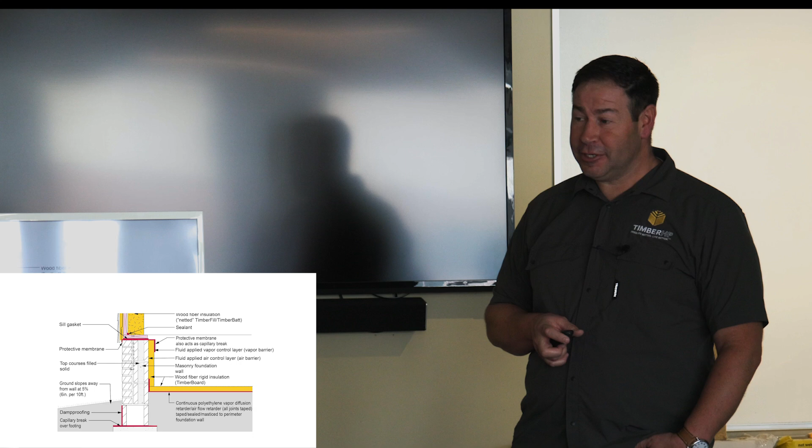So is everybody here familiar with Joe Lstiburek? He didn't invent building science, but he started Building Science Corp. He did invent the blower door test, so that's always a fun story. He also tells us that the Canadians gave us vapor barriers because of the Wayne Gretzky trade.

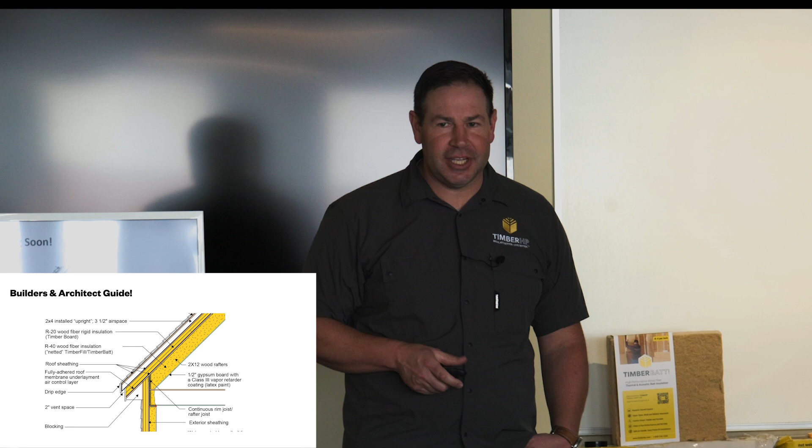And then these are just some other details that are also on there, like roof assemblies when you're using continuous insulation, still a vented system on top. Right here is also a QR code if you want to scan that to download it now, or again, it's on our website. Our website is very nice to work with.

And then that's pretty much it that I had. If there's any questions, I know we were kind of fielding questions as we were going, which I love.